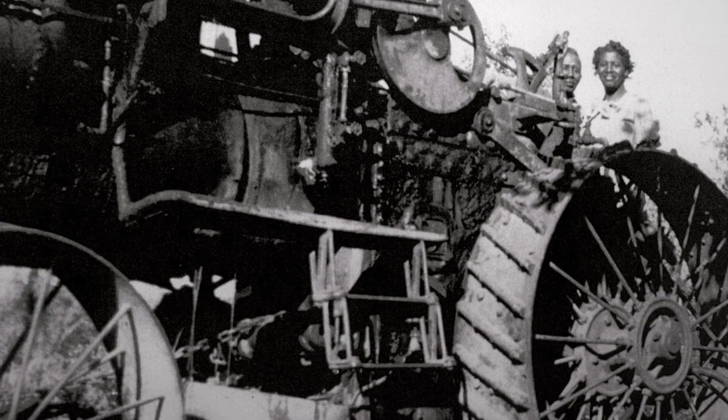The man watching this disaster has spent years building these tractors. He has tried bigger wheels, wider wheels, different configurations. Nothing works. His most powerful machine is being swallowed by the earth it was designed to work. At the time, this seemed like just another failure in a long line of failures. Nobody thought the man standing in that muddy field would solve a problem that had defeated engineers across two continents, but only because they had no idea who this man would eventually become.

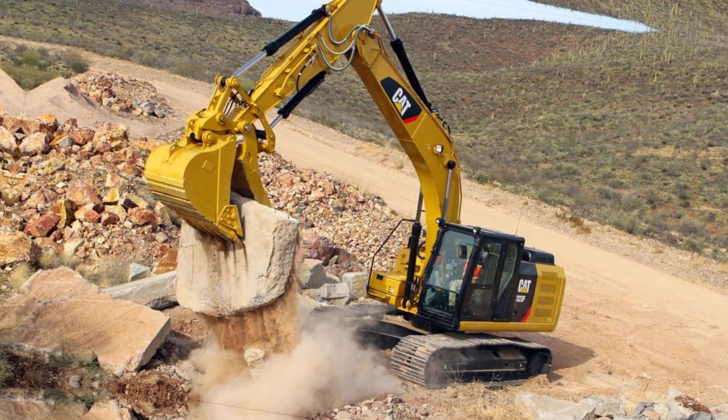Fast forward to today, and that failed tractor builder's name sits on yellow machines across 187 countries. His company employs 113,000 people, generates $67 billion in annual revenues, and commands a market cap exceeding $222 billion. The machines that build highways, dig mines, and raise skyscrapers on six continents all trace back to one man and one problem he refused to accept. This is the story of how a sawmill boy from New Hampshire built the Caterpillar empire.

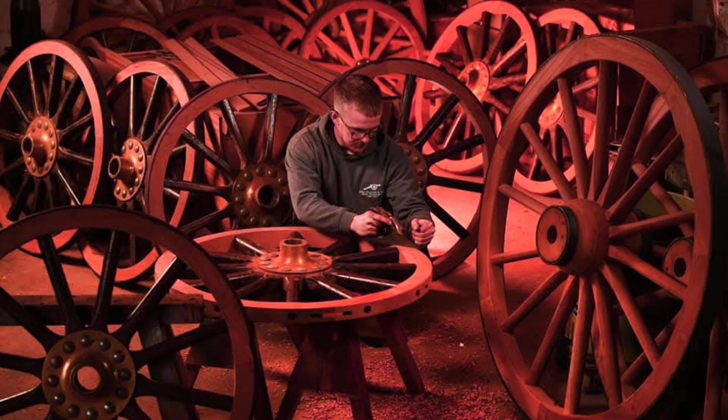Benjamin Leroy Holt was born on January 1, 1849, in Concord, New Hampshire, the son of a wagon wheel maker who would teach him everything about how weight moves across terrain.

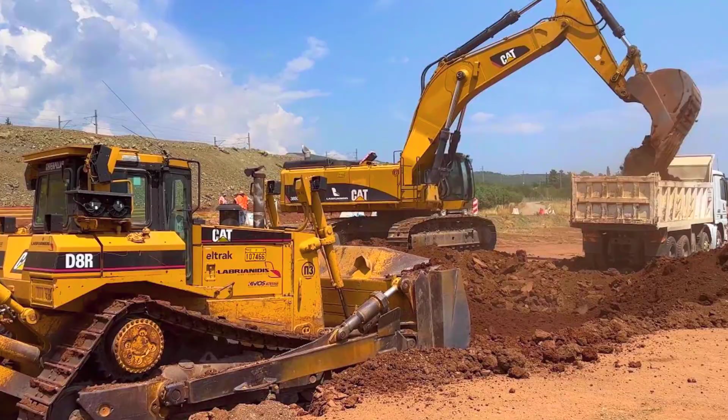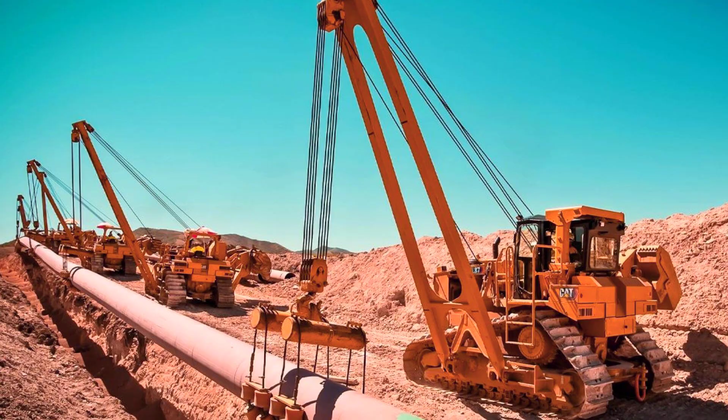If you've ever driven past a construction site, you've seen them: the massive yellow machines that dig foundations, move mountains of earth, and reshape the landscape of entire cities. Caterpillar Inc. Today, the company commands a market capitalization of over $222 billion, generates $67 billion in annual revenues, and employs nearly 113,000 people across 187 countries. From the copper mines of Chile to the construction sites of Tokyo, from pipeline projects in Siberia to highway expansions in Texas, the yellow iron is everywhere.

The machines that build highways, dig mines, and raise skyscrapers across six continents all trace back to one man and one problem he refused to accept.

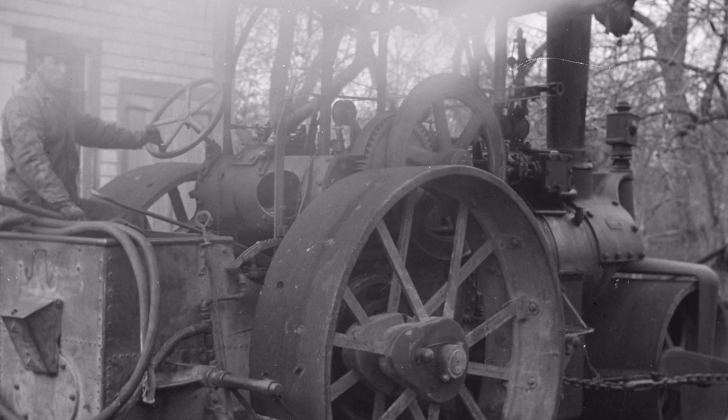Picture this: a California peat field in the early 1900s. A steam tractor, 48,000 pounds of iron, steel, and ambition, sinks helplessly into the wet soil. The wheels churn, the mud rises, the engine roars, but the machine goes nowhere. The most powerful farm machine in the state is being swallowed by the earth it was designed to work.

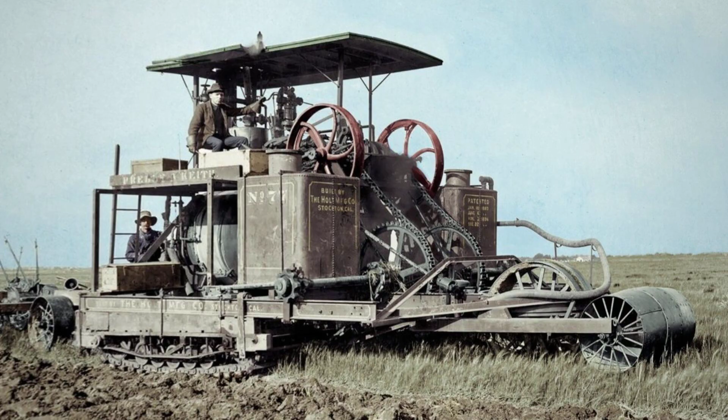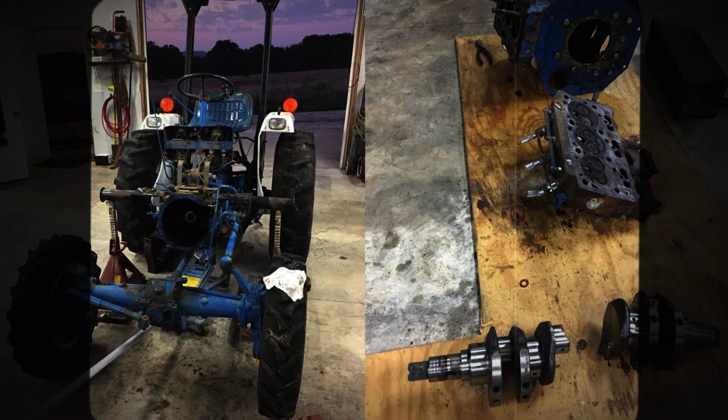The man watching this disaster unfold has spent years building these tractors. He has tried bigger wheels, wider wheels, different configurations. Every attempt to fix the problem has failed. Every solution has created new problems. The machines that move mountains today came from a man who couldn't stop his own machines from drowning in mud.

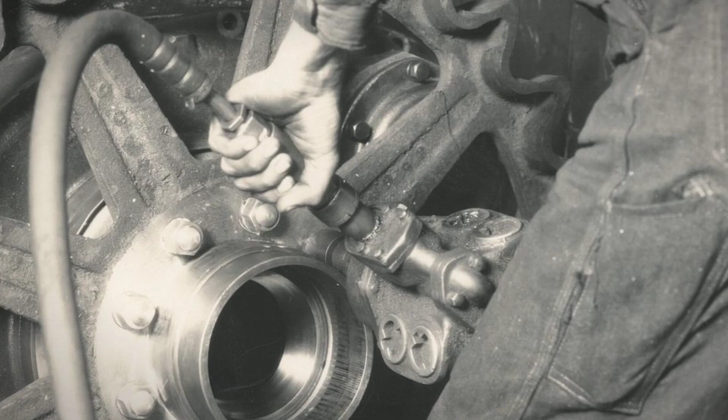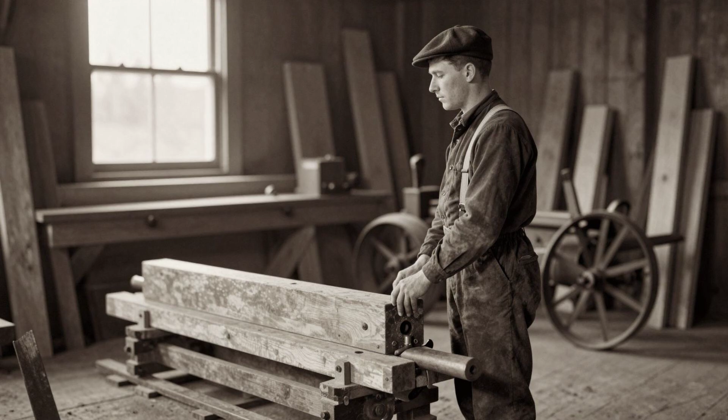Little did he know that removing those giant wheels entirely, replacing them with wooden tracks linked by chains, would birth one of the most recognizable industrial empires on Earth and give it a name inspired by the way it crawled. This is the story of Benjamin Holt.

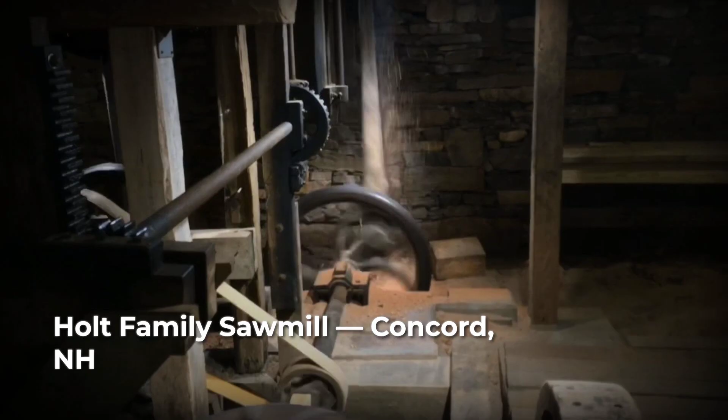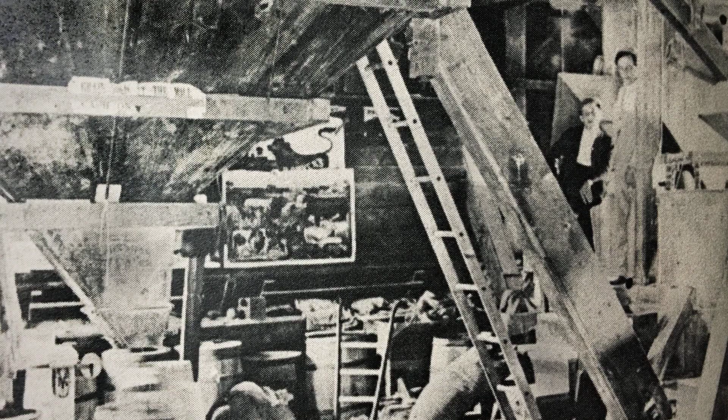Benjamin Leroy Holt was born on January 1st, 1849, in Concord, New Hampshire. He entered the world as one of 11 children born to William Knox Holt and Harriet Parker Ames Holt. His father owned a sawmill and made wagon wheels for a living. This was not a family of inheritance or influence. This was a family that worked. The Holts earned everything with their hands.

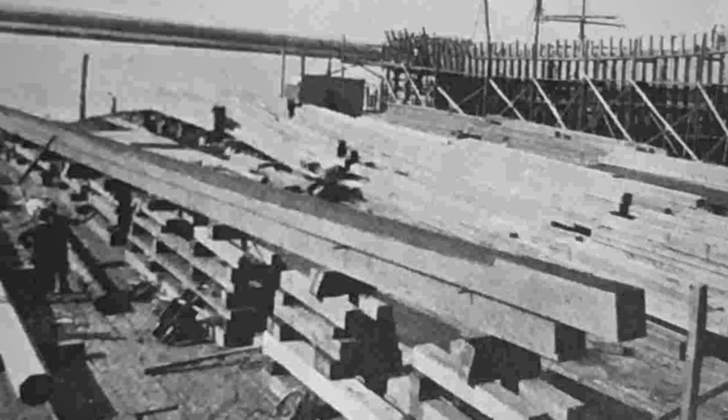The sawmill sat at the center of their existence, timber deliveries arriving at dawn, hardwood being shaped and cured through the seasons, the endless rhythm of turning raw wood into wheels that could carry weight across rough American terrain. Oak, hickory, ash. Benjamin learned the names and properties of these woods before he learned much else. He learned which species cracked under heavy stress and which ones held firm through years of punishment. He learned how moisture warped joints and weakened spokes. He learned how weight transferred through a wheel's hub to its rim to the ground below.

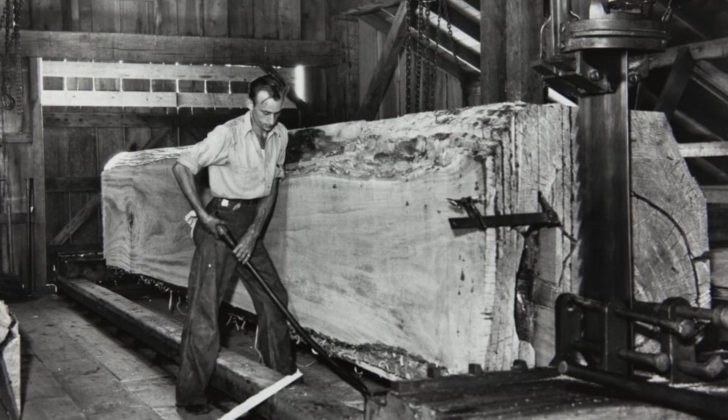There was no inheritance waiting for Benjamin Holt, no trust fund, no family estate. There was only the trade, the tools, and the work. The historical record preserves no words from young Benjamin. What it preserves is a pattern, a boy who learned by doing, who understood machines not from textbooks, but from building them alongside his father and brothers. By age 23, he had been given an ownership interest in the family business and assumed real operational responsibility. His classroom was the factory floor.

His teachers were failure and repetition. But the Holt family would not remain whole. Benjamin's mother, Harriet, died in 1875. His father followed not long after.

By the time Benjamin finally headed west to California in 1883, both parents were gone. He was 34 years old, orphaned in the adult sense. No family home to return to, no parental safety net waiting if things went wrong. Only the skills his father had drilled into him through years of sawmill labor, and the brothers who had already scattered toward new opportunities in the West.

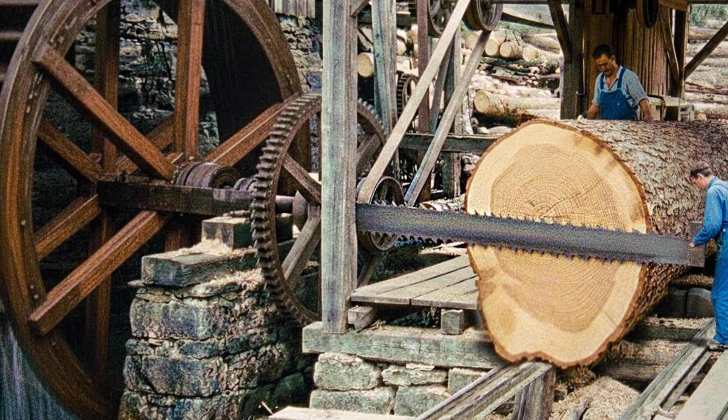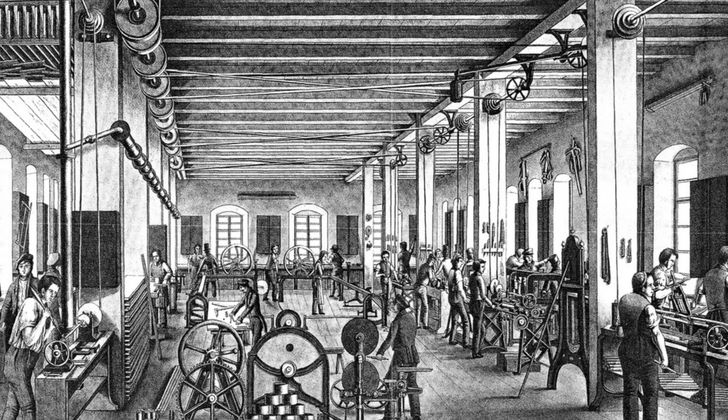The spark that would define Benjamin's life wasn't a single dramatic moment. It was years of accumulated understanding, working in his father's New Hampshire sawmill starting in 1869, preparing hardwoods for shipment west to his brother's growing California business. Benjamin handled the raw materials that would become wagon wheels day after day. He cut and shaped the wood. He watched wheels assembled and tested. He saw which designs held up and which ones failed.

Through this repetitive labor, he came to understand something fundamental: the relationship between weight, surface area, and terrain was the core problem of locomotion. A wheel concentrated weight onto a narrow rim. Soft ground couldn't support that concentration. The wheel sank. He didn't know it yet, but he was already thinking about the problem that would make him famous.

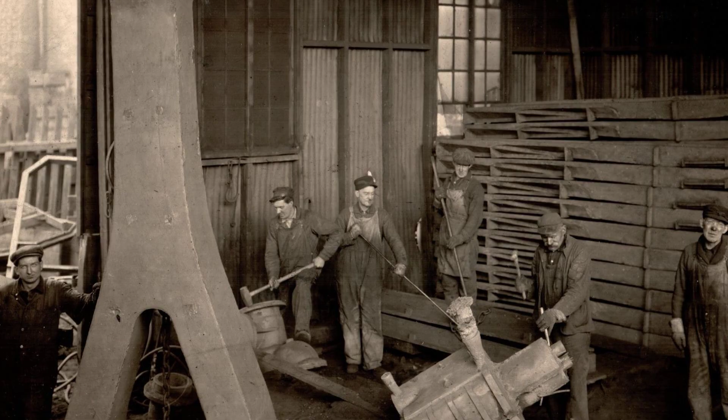The future wasn't in New Hampshire. Benjamin's older brother Charles had already proven that. Charles H. Holt had gone west in 1864, landing in San Francisco and building C.H. Holt and Company, a wheel and carriage materials business that served California's booming agricultural economy. The timing was perfect. California's Central Valley was exploding with wheat farms, and someone had to build the equipment to work them. Charles showed Benjamin that the family trade could scale far beyond their small New Hampshire operation.

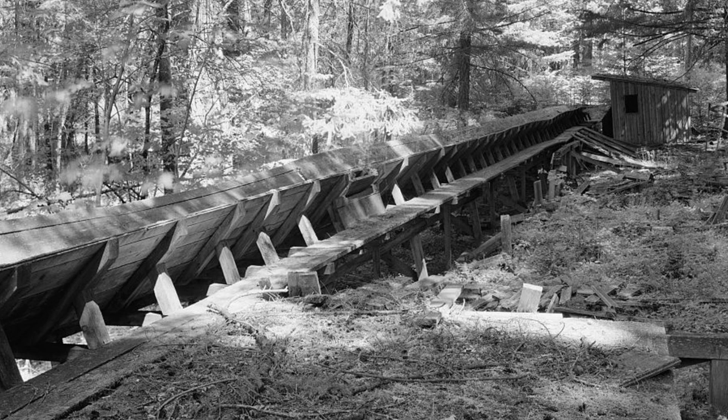Benjamin stayed east for years longer, learning the supply side of the business, while his brothers established the western beachhead. He mastered timber selection, knowing which trees from which forests produced the strongest wood. He learned the chemistry of wood curing, the logistics of cross-country shipping, the economics of moving heavy materials thousands of miles. Every skill would matter later.

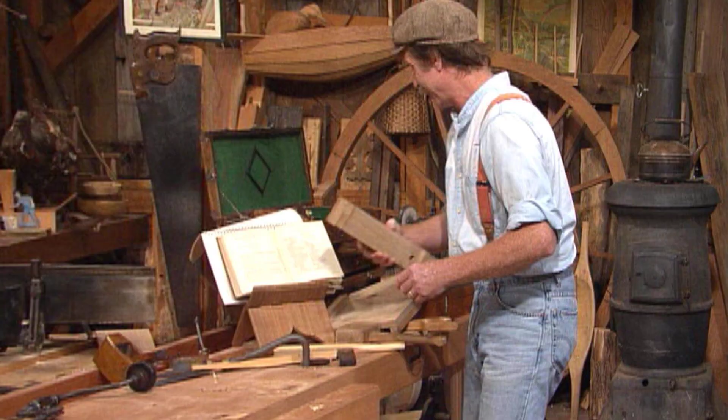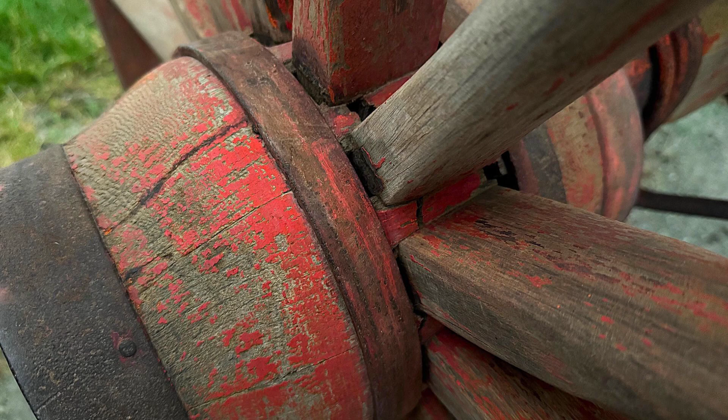When he finally made the move to California in 1883, Benjamin brought decades of manufacturing knowledge with him. He also brought a crucial insight that would shape his approach to every product. Wheels built in San Francisco's moist coastal climate cracked and warped when they reached the dry interior valleys. The wood couldn't handle the environmental transition. The solution was obvious once you understood it: build in Stockton, where the arid conditions allowed wood to cure properly before it ever left the factory.

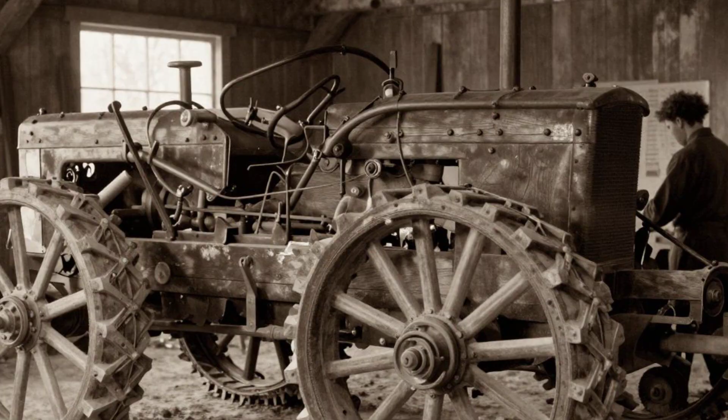This was Benjamin's first practical lesson in adapting machinery to terrain. It would not be his last. In 1890, Benjamin married Anna Brown, daughter of Stockton pioneer Benjamin E. Brown. The marriage anchored him in local society during the transformative years ahead. Anna provided the domestic stability that allowed her husband to take enormous professional risks. While Benjamin obsessed over machines, Anna maintained the household and the social connections that kept the family rooted in the community.

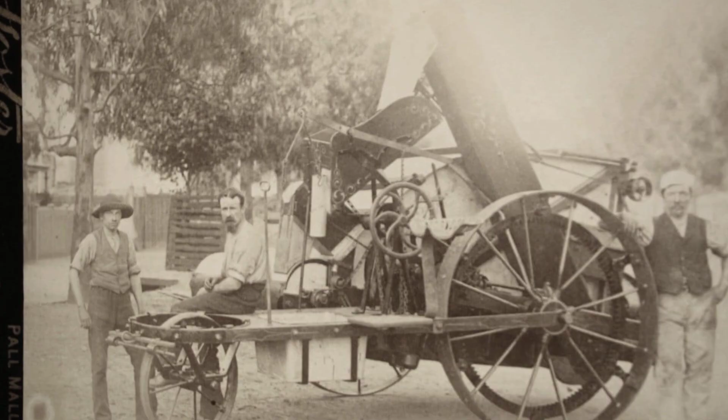The turning point in Benjamin's ambition came as he watched California farmers struggle with the fundamental limits of animal power. Horses and mules could only pull so much weight. The Central Valley's vast wheat fields, some of the largest agricultural operations in the world, demanded something more powerful, something mechanical. Holt began studying steam-powered traction engines, machines that could theoretically replace dozens of horses.

But he noticed something troubling in every demonstration he observed. The heavy steam tractors that already existed were constantly getting stuck. The rich delta soil that made California farmland so extraordinarily valuable was also impossibly soft and wet. Machines sank to their axles. Wheels churned uselessly in the muck. All that engine power meant absolutely nothing if you couldn't move.

The ambition forming in Benjamin's mind wasn't simply to build tractors. It was to build tractors that could actually work in the real conditions of California agriculture. By 1883, Benjamin had buried both parents and followed his brothers west. He arrived in Stockton not as a young man chasing uncertain dreams, but as a seasoned manufacturer in his mid-30s, backed by decades of practical experience and ready to build something substantial.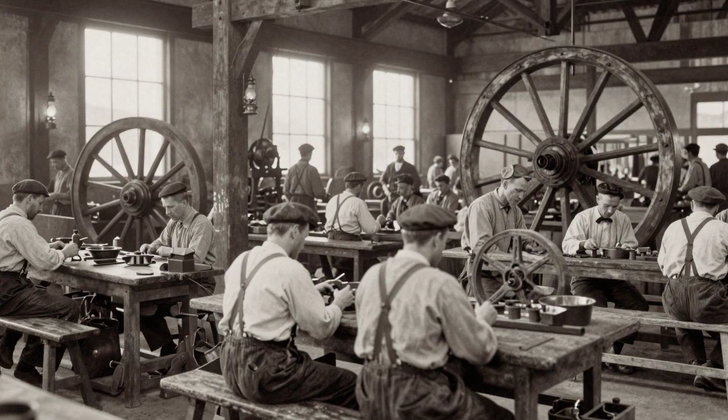To put that in perspective, $65,000 in 1883 represented serious capital. This was not a garage startup or a hopeful experiment. It was a real manufacturing operation with significant machinery, genuine payroll obligations, and substantial financial risk from the very first day.

In January 1892, the brothers incorporated as Holt Manufacturing Company. Benjamin became president, assuming formal leadership of the enterprise he had helped build. The early products were familiar extensions of the family trade: wagon wheels, carriages, agricultural equipment adapted for Western conditions.

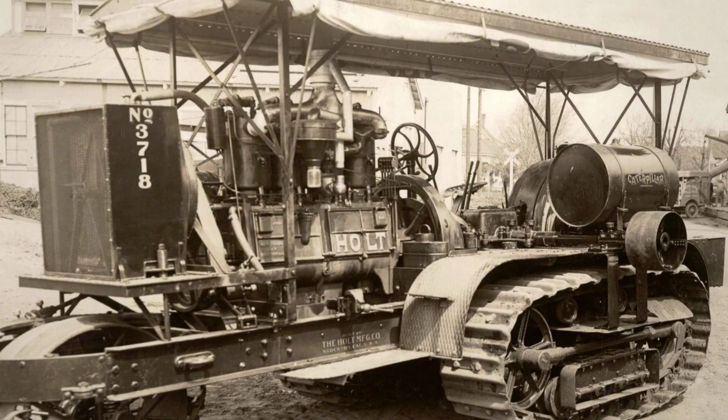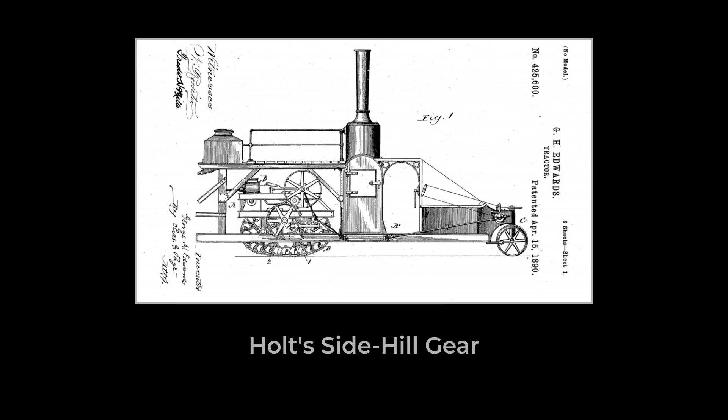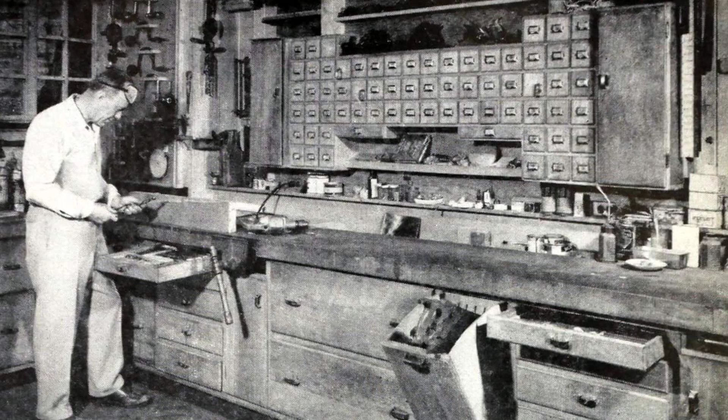But Benjamin pushed beyond wheels almost immediately. He couldn't stop thinking about terrain. He developed a side hill harvester that could work slopes as steep as 30 degrees while keeping the threshing mechanism perfectly level. The machine was a minor marvel of mechanical engineering, solving a problem that had frustrated California farmers for years. It was also a sign of the obsession to come.

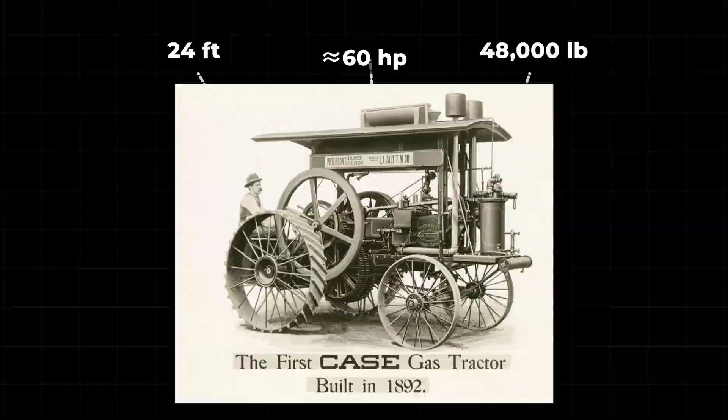Benjamin Holt was consumed by the challenge of making machines work on difficult ground. By 1890, Holt had built his most ambitious machine yet, a monster he called Old Betsy. The steam tractor featured a 24-foot frame, generated approximately 60 horsepower, carried 675 gallons of water, and weighed roughly 48,000 pounds. Old Betsy could do the work of dozens of horses. In terms of raw pulling power, it was the most formidable farm machine in California. There was just one devastating problem.

It kept sinking. The San Joaquin Delta contained some of the richest farmland in the world, deep, dark peat soil that was perfect for growing crops. Farmers could grow almost anything in that black earth, but the same soft, wet ground that made the Delta so fertile was a death trap for heavy machinery.

Old Betsy would roll into a field and slowly, inexorably bury itself. The massive iron wheels would churn and spin, the mud would rise around the frame, and the most powerful tractor in the state would sit there, helpless and immobile, while farmers watched their expensive investment disappear into the ground.

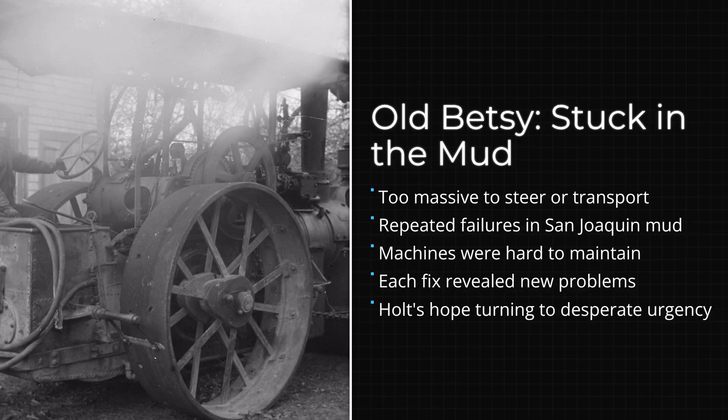Holt tried bigger wheels to spread the weight. He tried wider wheels for more surface contact. He tried every wheel configuration his engineers could devise. Nothing worked. Each solution created new problems, machines so massive and awkward that they were nearly impossible to steer, maintain, or transport. A tractor that can't move is just expensive scrap metal. And Benjamin Holt was running out of ideas. The sinking problem consumed him.

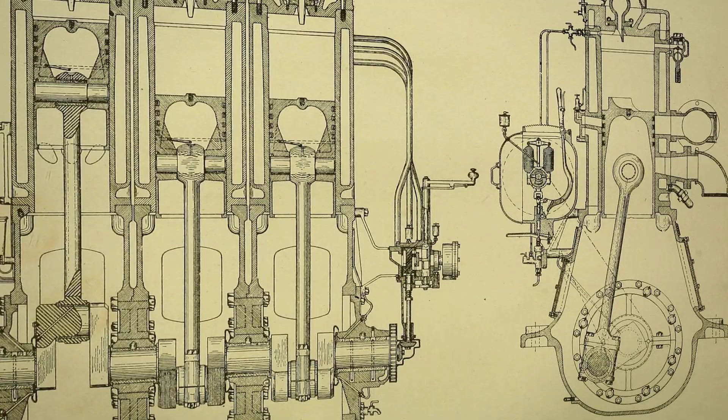Holt wasn't the first person to imagine a tracked vehicle. The concept had existed in patents and theoretical designs for decades. Engineers across Europe and America had sketched endless track systems on paper. But paper drawings and working machines are very different things.

In 1903, Holt traveled to England specifically to study ongoing crawler experiments. He wanted to see if someone, somewhere, had cracked the code. What he found was failure after failure. The European machines couldn't survive real field conditions. They broke down under heavy loads. The tracks came apart. The linkages failed. They were engineering theories that collapsed when confronted with practical reality.

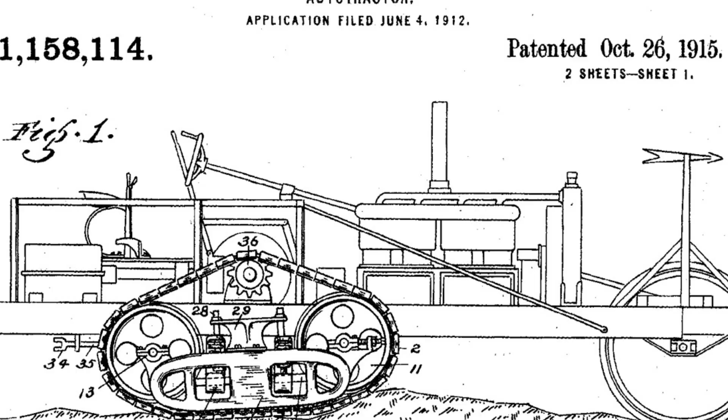Holt came home knowing two things with absolute certainty. First, the underlying theory was sound. A tracked system that spread weight across a larger surface area should work. Second, every existing execution was wrong. If he wanted a practical crawler tractor, he would have to build it himself.

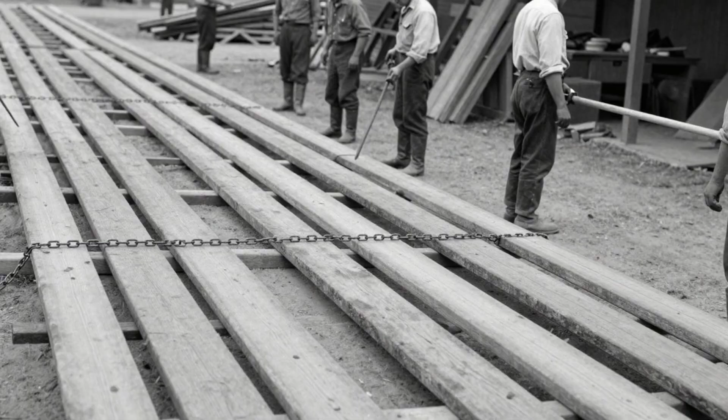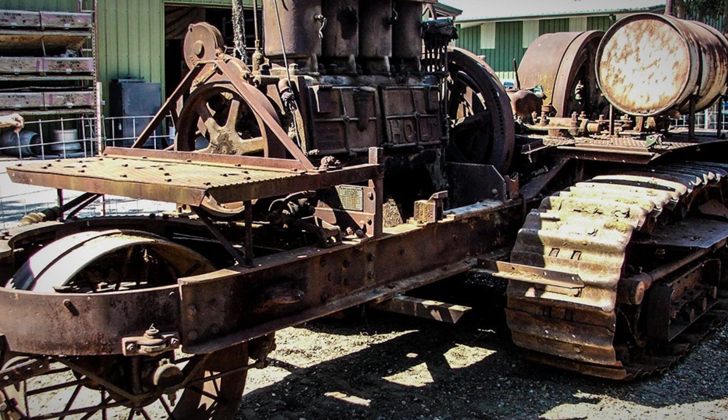By late 1904, Holt had developed his own design. He instructed his mechanics to remove the rear wheels from a steam tractor entirely and replace them with something no one had successfully built before, a continuous track system made of wooden planks linked together by chains. Instead of concentrating the machine's enormous weight onto narrow wheel rims that dug into soft ground, the track would spread that weight across a much larger surface area. The patent application would later describe it as an endless, flexible traveling platform.

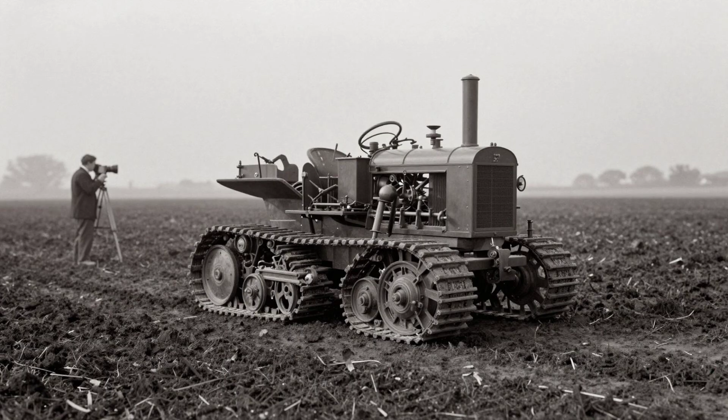On Thanksgiving Day, November the 24th, 1904, they tested the prototype, designated number 77, in a peat field on Roberts Island near Stockton. This was the same impossible soil that had swallowed Old Betsy and every other wheeled tractor before her. The tracked machine crawled across the soft ground. It didn't bury itself. It didn't stop. It didn't sink. It moved. The breakthrough had arrived. But the moment that would define the company and give it a name known around the world came a few months later.

March 1905, an improved version of the tracked machine was being demonstrated in the fields outside Stockton.

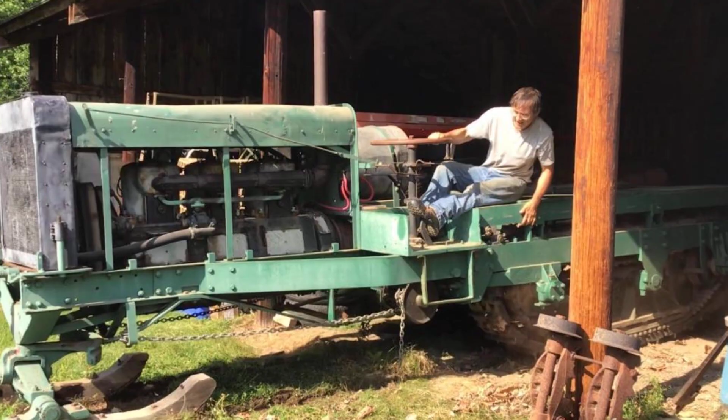Company photographer Charlie Clements arrived to document the test for promotional materials. He looked across the field and saw the machine moving in the distance, but something seemed fundamentally wrong with what he was seeing. "They are not running," Clements said, confused. He couldn't see any wheels turning. The machine was moving, but there was no rotation visible from where he stood.

Then he walked closer. He watched the tracks undulate across the soft earth, the linked wooden planks rising and falling in sequence, gripping the ground and pulling the massive steam engine forward through soil that had defeated every wheeled machine ever built. The movement was almost organic, rhythmic, flowing, relentless. "If that don't look like a monster caterpillar," Clements said.

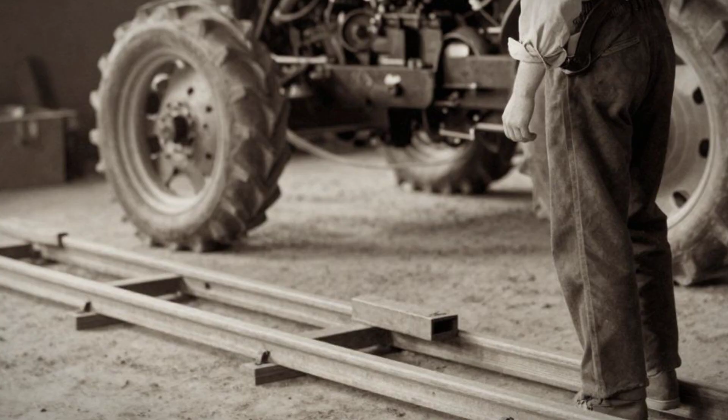Benjamin Holt, standing nearby with his nephew Pliny Holt, turned to the photographer with a half smile. "What makes you think that?" But the name stuck. And Holt was smart enough to recognize what he had. He understood immediately that he had invented more than a machine. He had created an image, something people could visualize and remember.

Over the next several years, he executed three strategic moves that transformed an engineering breakthrough into an enduring brand. First, he embraced the Caterpillar name completely, turning a photographer's casual observation into the company's identity. Second, he registered Caterpillar as a trademark with the US Patent Office on August 2, 1910, claiming continuous commercial use since 1904. Third, he launched an aggressive marketing campaign built around exclusivity and authenticity: there is only one Caterpillar, and Holt builds it.

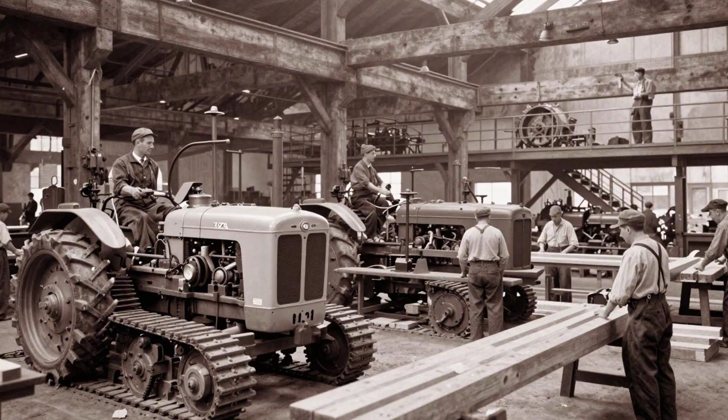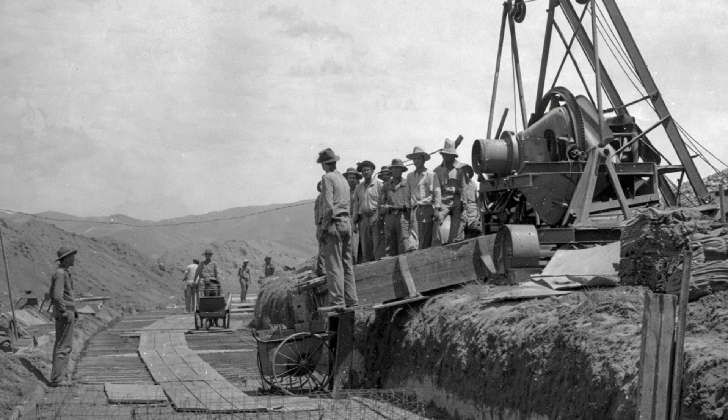US patent number 874,008 was issued on December 17, 1907. The first production tractor officially branded Caterpillar rolled off the line in 1909. By then, Holt's tracked machines were already proving themselves far beyond California agriculture, in Pacific Northwest logging operations, in road construction projects, in the massive aqueduct systems being built to bring water to growing cities. The mud problem was solved.

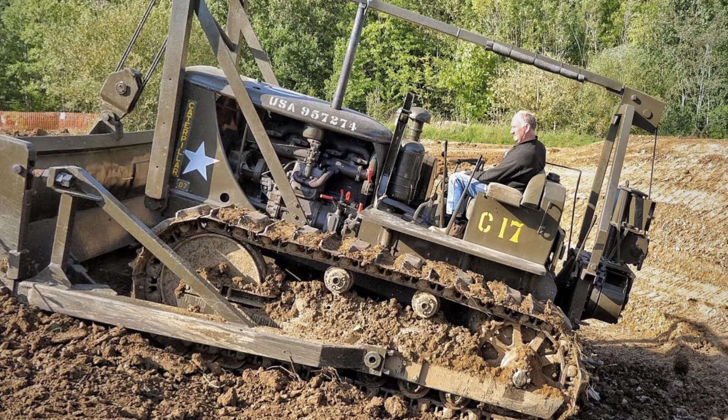The Caterpillar empire was being born. But success brought its own burdens, and the years surrounding Holt's greatest invention were shadowed by devastating personal loss. His brother Ames Frank Holt had died on October 7, 1889.

His brother William Harrison Holt died on February 15, 1904, the very same year as the breakthrough test on Roberts Island. And Charles H. Holt, the older brother who had gone west first, who had built the foundation of the California business, who had believed in Benjamin's vision and helped make the company possible, died on July 8, 1905, just months after the Caterpillar was named.

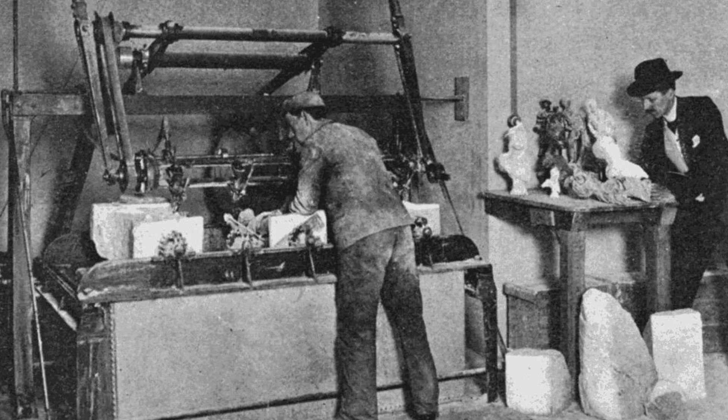By the time Benjamin's invention was fully proven and entering production, the brother network that had built the company around him had collapsed entirely. Three brothers gone in 16 years. Benjamin was now carrying the family business alone through its most consequential technical and commercial transformation. He left no recorded words about these losses. He left machines. Then came the war.

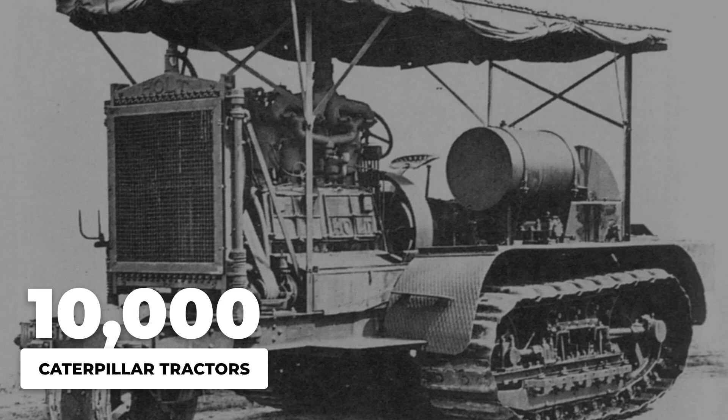World War I transformed Holt tractors from agricultural equipment into instruments of military power. From 1914 to 1918, Holt's company and licensed manufacturers produced approximately 10,000 Caterpillar tractors for wartime use. The machines that had been designed to cross California peat fields were now hauling artillery pieces and supply wagons across the churned, muddy battlefields of France and Belgium. The same tracks that prevented sinking in farm soil prevented sinking in the shell-cratered wasteland of the Western Front.

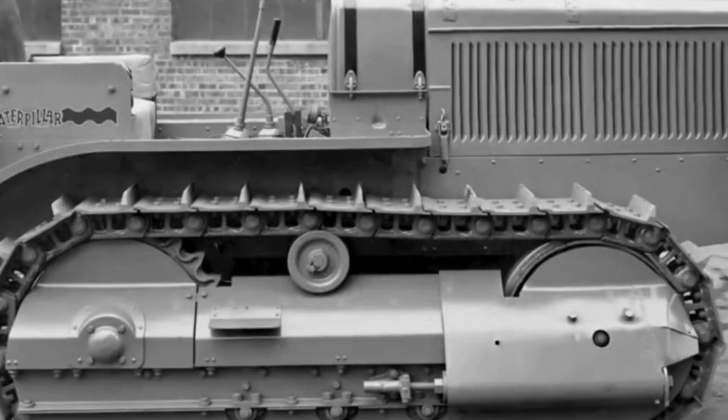Murray Baker, Holt's aggressive plant manager, pushed military contracts relentlessly. The company secured deals with Britain, France, and eventually the United States after America entered the war in 1917. The Caterpillar became a symbol of Allied logistics capability, but victory created its own devastating crisis.

The war had pushed Holt toward production volume at the expense of innovation. Every resource went toward filling government orders. Meanwhile, a domestic rival named C. L. Best was capturing the American agricultural market with newer tractor designs and a much stronger dealer network. Best was building the future while Holt was winning the war.

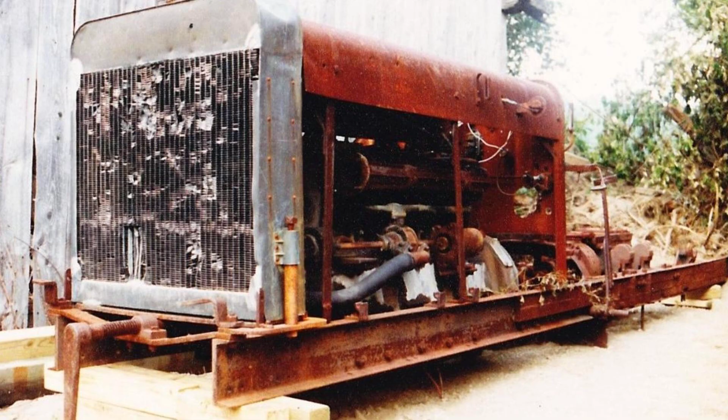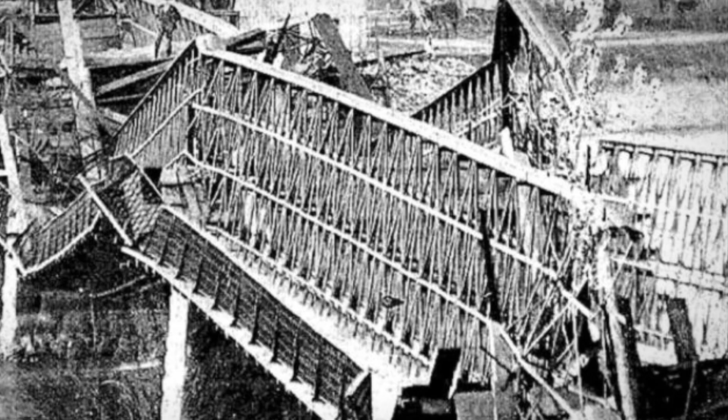When the armistice came in November 1918, Holt found himself in an impossible position: surplus machines sitting unsold, a weaker competitive standing in his home market, and a company that had traded its innovative edge for wartime output. Caterpillar's own corporate history is blunt about this period: Holt and Best needed each other. The Caterpillar name was famous around the world, but the company behind that name was now vulnerable in ways Benjamin had never anticipated.

Imagine one more time a 48,000-pound tractor sinking into wet peat soil, the iron frame tilting, the wheels churning uselessly, the mud rising around the machine like quicksand swallowing a victim.

That physical nightmare had been Benjamin Holt's daily reality before the tracked tractor breakthrough. Now, in a different way, it was happening again. His company was sinking into competitive quicksand, and this time, Benjamin Holt would not live to engineer the solution.

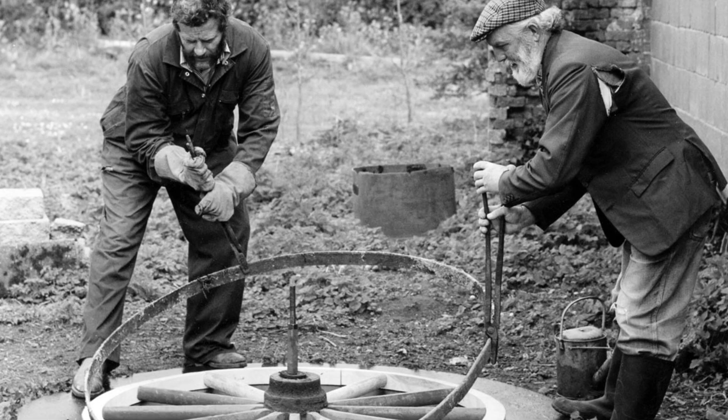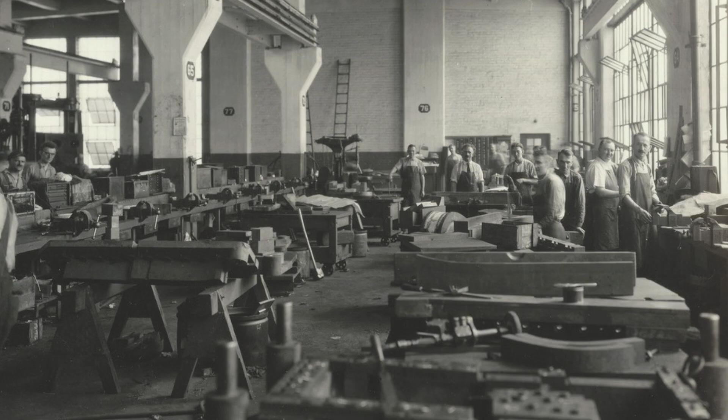To understand how far Benjamin Holt's invention ultimately traveled, consider the full arc of acceleration. In 1883, he started with 25 workers making wagon wheels in a Stockton factory. By 1897, just 14 years later, the company employed roughly 200 people and had sold more than 800 combined harvesters across California. The business had grown from a regional wheel shop to a genuine manufacturing power in less than a decade and a half. By 1918, his machines were helping win a world war, with 10,000 Caterpillar tractors serving on battlefields across Europe.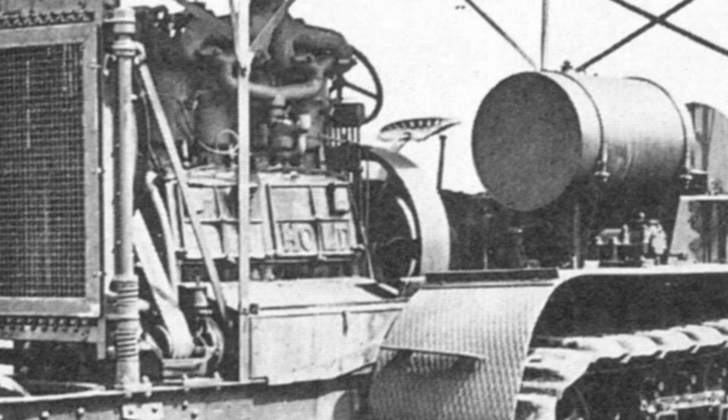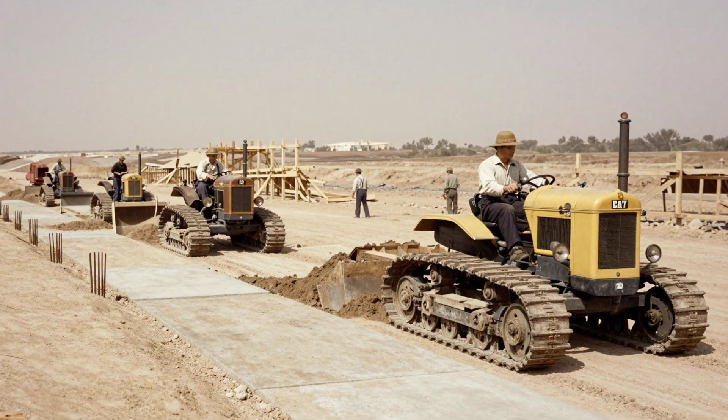The track-type tractor expanded far beyond its agricultural origins. Holt machines moved into timber logging operations throughout the Pacific Northwest. They built roads through impossible terrain. They helped construct the massive aqueduct systems that would transform Southern California. They hauled equipment for mining operations in places wheels could never reach.

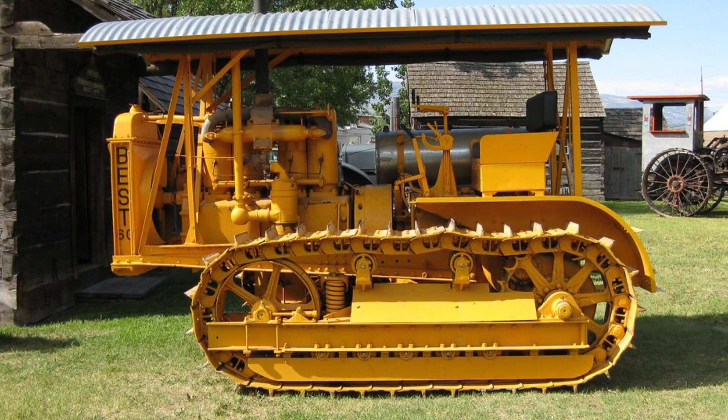The crawler wasn't just a farm tool anymore. It was the technological foundation for the entire modern heavy equipment industry. The Caterpillar name became synonymous with tracked machinery worldwide. When people anywhere on Earth thought about machines that could cross difficult ground, they thought of the crawling yellow tractors from Stockton.

5 years after Benjamin's death, the solution to his company's competitive crisis finally materialized. In 1925, Holt Manufacturing Company merged with CL Best Tractor Company to form Caterpillar Tractor Company. The deal was brilliantly complementary. Holt brought international reputation, the invaluable Caterpillar trademark, and established manufacturing facilities. Best brought domestic market strength, a superior dealer network, and a broader product line.

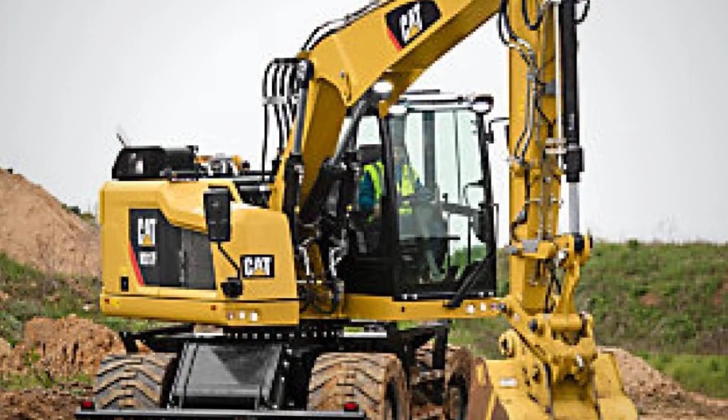CL Best, the rival who had quietly outmaneuvered Holt in the American market during the war years, became the first chairman of Caterpillar Tractor Company. The competition that had nearly weakened both enterprises became a partnership that would dominate the global heavy equipment industry for a century. The company renamed itself Caterpillar Inc. in 1986. The merger Benjamin never lived to witness created the industrial giant that now moves Earth on every continent.

Today, Caterpillar Inc. employs approximately 112,900 people worldwide. It operates through 152 authorized dealers serving 187 countries. It generates $67.6 billion in annual revenues and commands a market capitalization exceeding $222 billion.

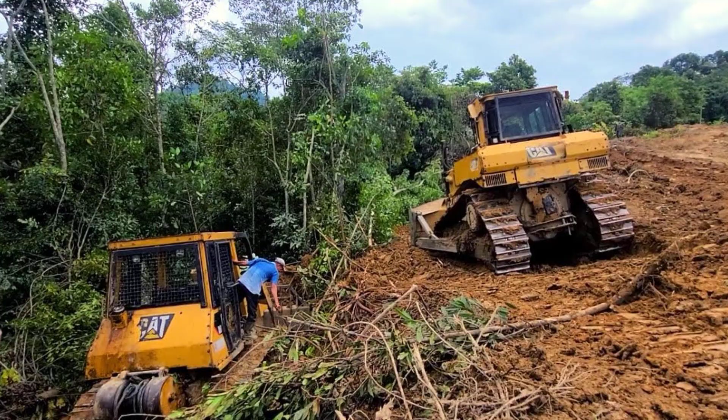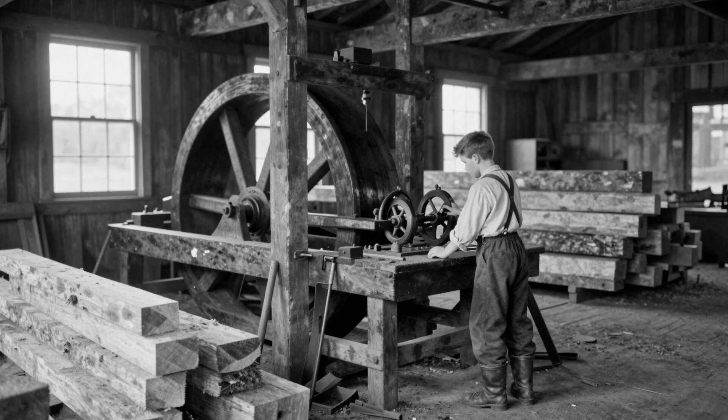The yellow machines bearing the Caterpillar name build highways, excavate mines, raise skyscrapers, clear forests, and reshape terrain from the Amazon basin to the Arctic Circle. Every single one of them descends from a wooden-tracked steam tractor that crawled across a California peat field on Thanksgiving Day, 1904, because a sawmill boy from New Hampshire refused to accept that his machines should keep sinking.

Benjamin Leroy Holt died on December 5, 1920, in Stockton, California. He was 71 years old. Historical records suggest he died after a month-long illness, though the specific cause is not documented.

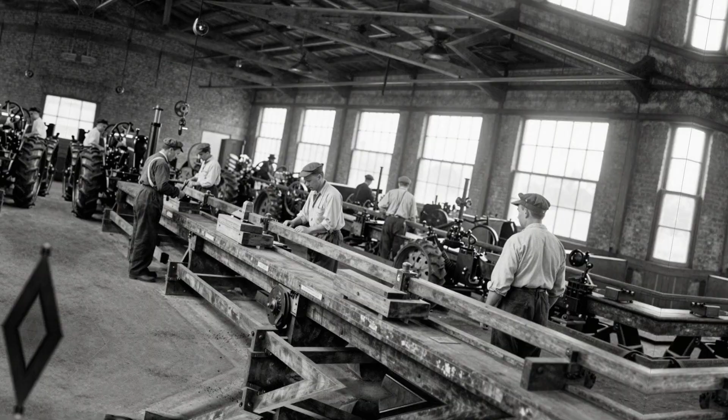There is no evidence he ever formally retired. He remained connected to the company he had built until the very end. He never stopped working. He never stopped building. No reflective deathbed quote survives in the accessible historical record. But Benjamin Holt's actions across 7 decades spoke with perfect clarity.

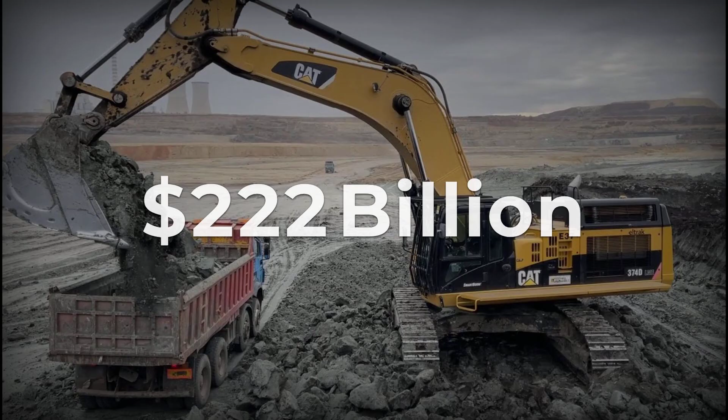He converted a photographer's casual joke into one of the world's most recognizable industrial trademarks. He converted an impossible mud problem into a revolutionary technology. He converted a family wheel shop into the direct ancestor of a $222 billion global empire.

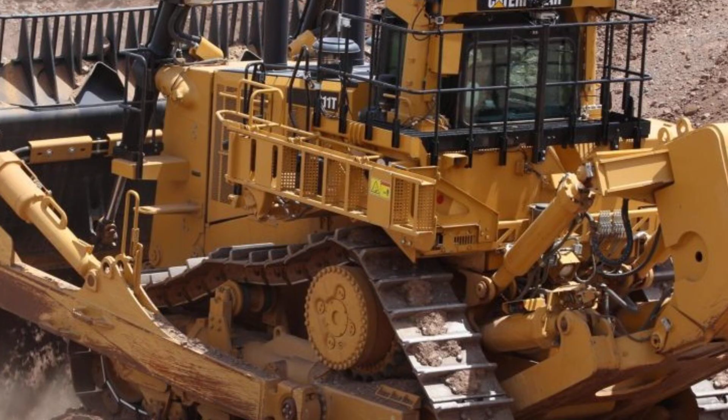5 years after his death, his company merged with his greatest competitors. The resulting corporation, Caterpillar Tractor Company, became the foundation of the modern heavy equipment industry. The yellow machines Benjamin never lived to see now operate on every continent, in virtually every country on Earth, building the infrastructure of human civilization.

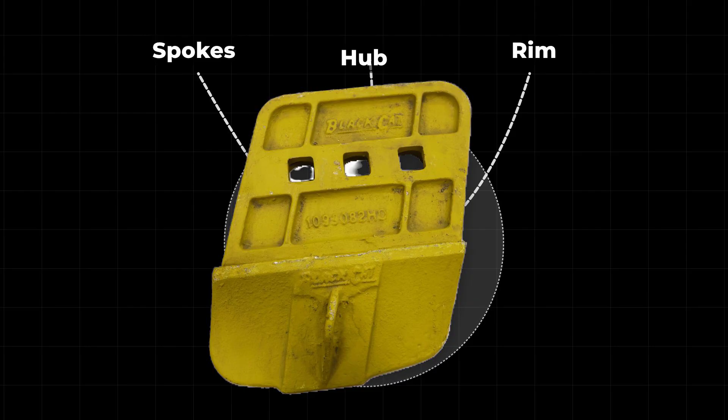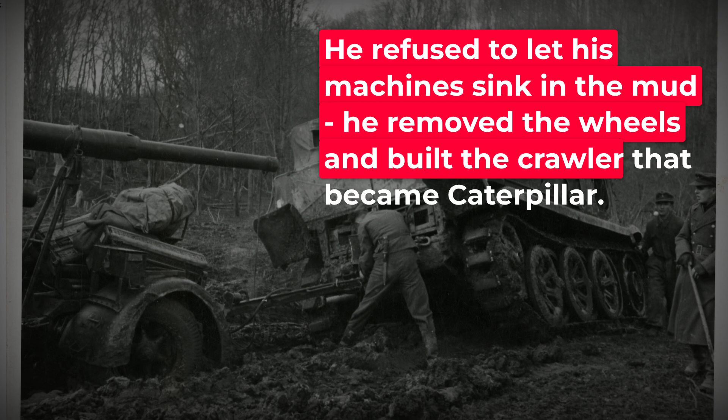Benjamin Holt started as a sawmill boy in Concord, New Hampshire, learning why wagon wheels crack under heavy loads and how wood behaves when weight presses down through a hub. He ended as the man who removed the wheels entirely, and in doing so, built machines that could cross any ground on Earth. The empire that now spans 187 countries began with a simple observation on a spring morning in 1905, that a tractor crawling across a muddy California field looked like a caterpillar.